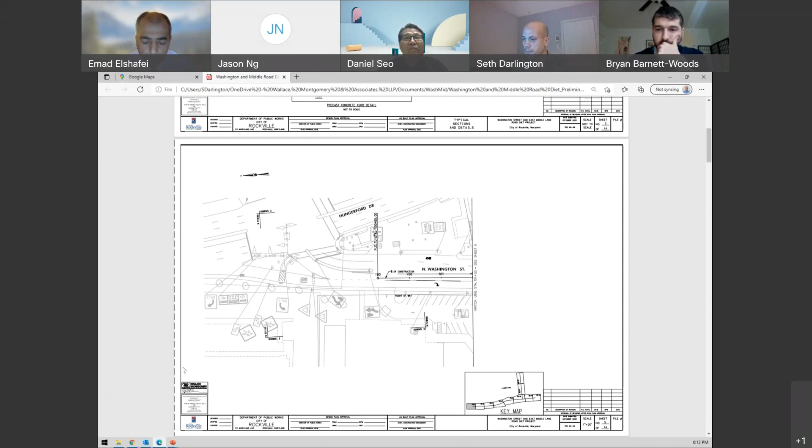But as we move south, you can see that we've got 2 lanes of traffic really in each direction at this point, approaching that intersection. And then as we move south, I'll slide to the next plan. You can see that we're transitioning to 1 lane in each direction of vehicle travel.

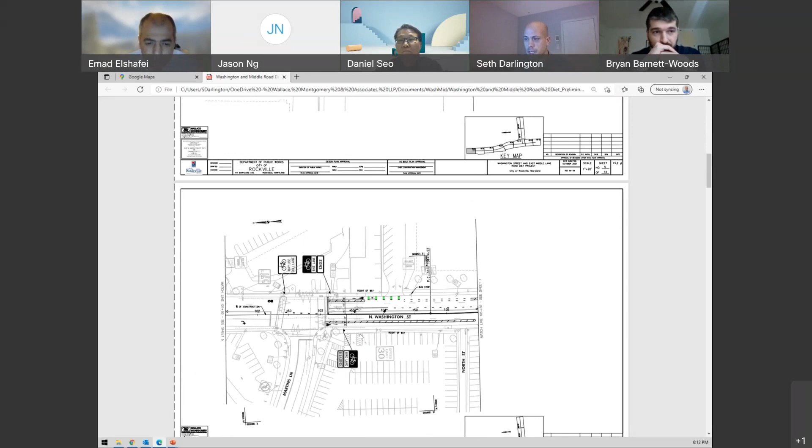And then we're able to add in bike lanes on either side of the roadway, and a buffer in between the bike lane and the travel lane. I'm going to zoom in on that area a little bit so you can see what's going on. Hopefully you can see my cursor as well here. So this area here is the bike lane.

It's 5 feet wide. It's against the curb of the existing roadway. And then this striped hatch area, this is the buffer - the separation between cars traveling and bicyclists traveling. In that buffer, what you're seeing here is paint marks, just painted stripes on the roadway. The width of this in this location is 3 feet. So it's a good separation between cars doing 25, 30 miles an hour and bikes doing 10 or 15.

It's comfortable for bicyclists to use, and that separation is enhanced in this case where we're expecting to add in a concrete barrier that positively separates the bikes from the vehicles. That concrete barrier is a precast, pre-made system. It's a concrete, low concrete curb essentially. It's 2 feet wide, and low to the ground. It'll be visible for cars and bikes. It'll be a positive barrier, so cars can't swerve over into that bike lane without jumping over the curb. That really brings up the safety and the usability of that bike lane.

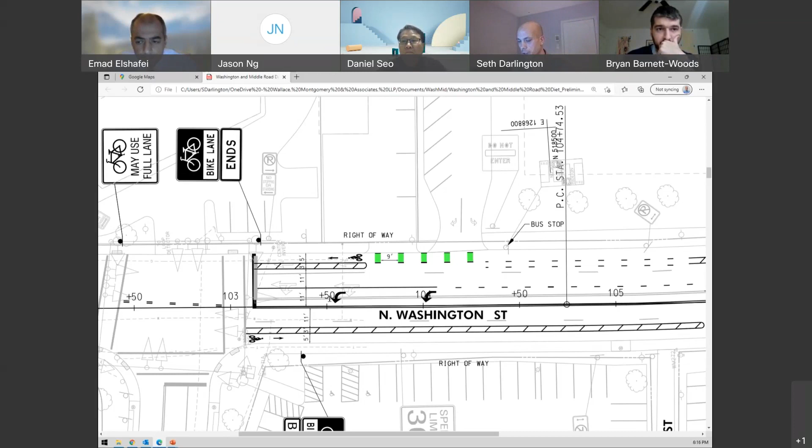So, how to read these plans a little bit more: the gray lines, sign shapes, and shading is all of what's out there now. The darker black and green signs and line work are all of the proposed work. That's how you can see what's changing in these plans.

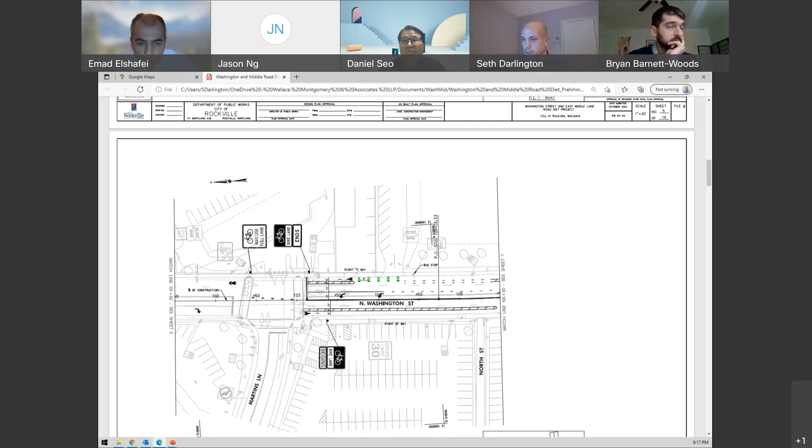Okay, I'm going to move south again, and point out a couple things on this plan. This is pretty consistent with the one we just went over: 2 travel lanes, one in each direction, bike lanes on the curbs, and buffers in between the bike lanes and travel lanes.

One of the things you'll notice here is we've got these green block shapes on the roadway, and that's where we have conflict areas between bicyclists and vehicles -- where vehicles turn in and out of driveways, or cross over the bike lane for a left turn. We're not showing that in this location, but that would be another use for those green areas. I'm sure you've seen these elsewhere.

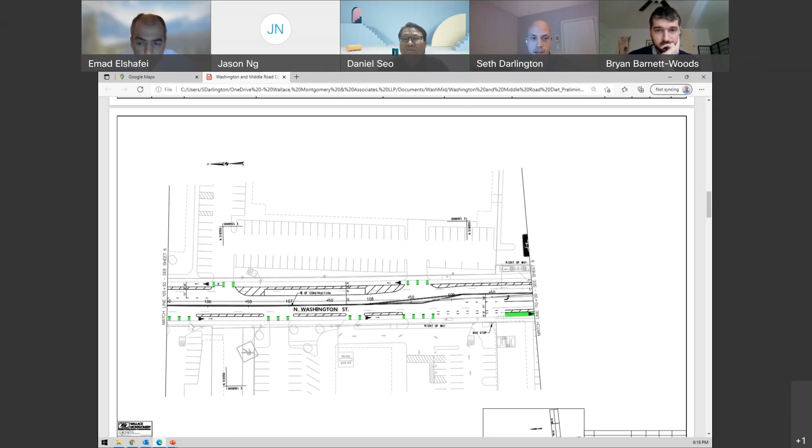It's just green paint that highlights a location where you need to look out for bicyclists, whether you're driving a car or a bike, for turning vehicles coming across your path. So it's a good visual indication for that safety area.

The other thing you'll notice is this location where there's a wide hatched out area -- we are putting in street parking here. This larger rectangle area is where street parking is proposed, in a floating parking system where the bike lane stays against the curb, and the parked cars are pushed towards the travel lanes, right on the edge of the roadway. This further buffers the bike lane from traveling vehicles.

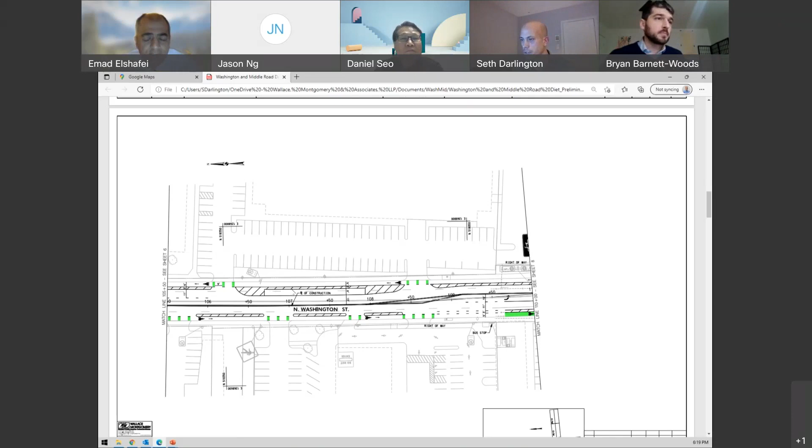So you can see we've got a wider travel lane through here, narrowing. We don't need that much room for parking -- a little bit of a buffer and a bike lane pretty consistently all the way through. Where these floating parking areas are, we wouldn't need those concrete barriers as the buffer.

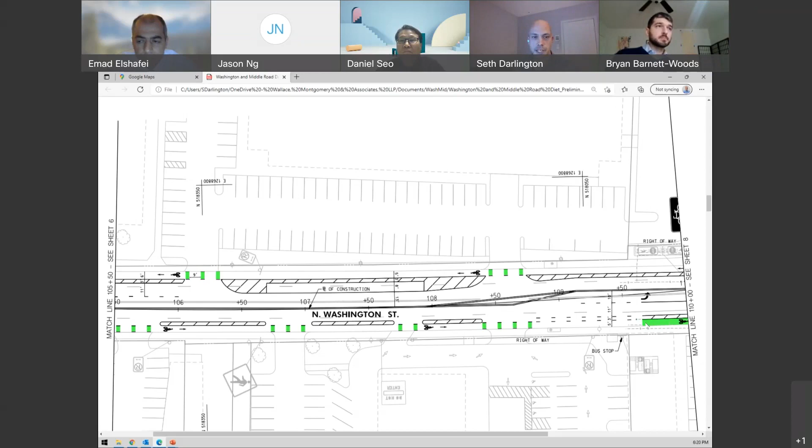So I'm going to move south again, but I'll point out one thing here: this solid green area is part of a bike box for the next intersection, and I'll explain that as we get down here. So I'm going to move south.

Now, as I just mentioned, there's this bike box at the Dawson Ave intersection. That's a way for cyclists to navigate through this intersection and make safe left turns. At this point, when making left turns, they'll be integrated with the flow of traffic through the intersection. They should follow the street signals for traffic. When there's a left turn indicated with a green arrow, they'll be able to make that left turn. But to do that, they need to be in the travel lane, and visible, in front of turning vehicles.

So it allows cyclists in the bike lane to travel up north, and when there's a red stop, come across into the bike box. This is an area just for cyclists -- vehicles need to stop at the stop bar behind it, and cyclists will stop right in front of turning vehicles. When the green arrow starts, the cyclists will be in front of vehicles. They'll make their way through the intersection, turning left, going west on Dawson Ave, entering that bike lane, and then the cars can move on beyond them.

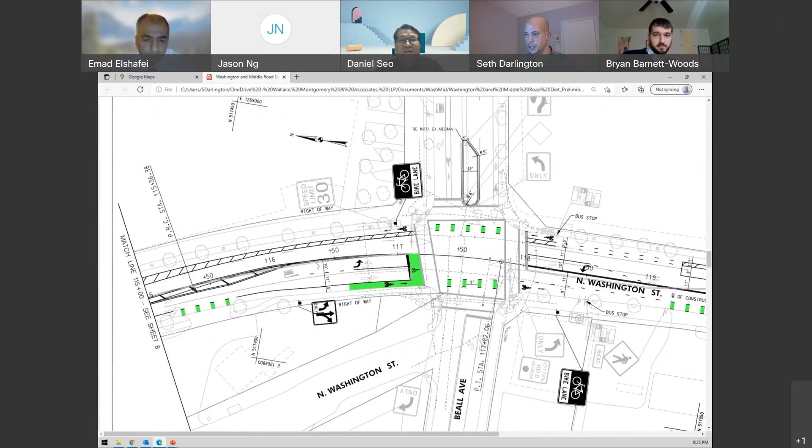I'm going to keep going south here. We're pretty consistent within the roadway still, two lanes of travel in each direction down to one. We've got left turn lanes, parking where we can, and another bike box here for the left turn onto Beall.

One other thing I want to point out here is that we've got another proposal to remove some of the pavement, at this location. This is a little island here on the west side of the Beall intersection.

Approaching from the east, approaching to the west on Beall, we've got a left turn lane, so this lane of Beall is going left only. We've got a through lane. Then on the western spur of Beall, we've got two lanes of traffic, but this center lane really should never be used because there's really only one lane of travel entering it.

So we thought, why don't we expand this median? Again, it could be landscaped, there could be enhancements in that area, it could be stormwater management, which we'll need for this project. But it really effectively shortens the crossing distance for pedestrians on this side of the intersection. They're really only crossing one lane of travel, then they've got a refuge area in the center, and then they can cross the other two lanes when it's safe to do so.

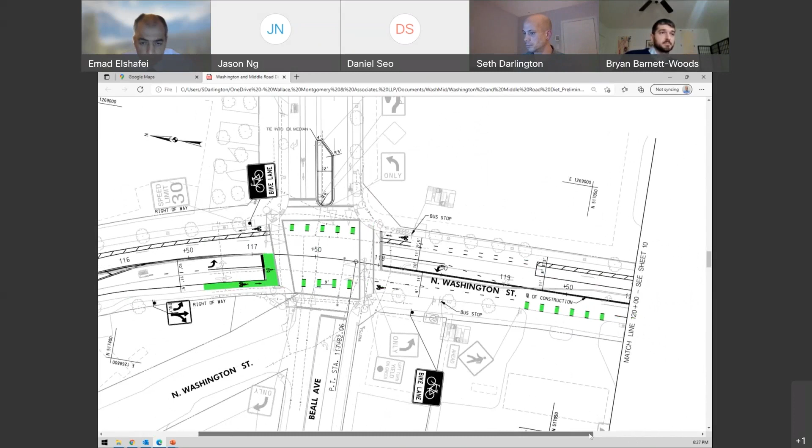So another small thing that we're looking at for enhancing safety. We'll keep coming south, but I want to point out more parking area in here, this location just south of Beall Ave. Parking here, a little bit of parking here. Again, consistently two lanes of travel down to one in each direction, turn lanes where we can fit them in.

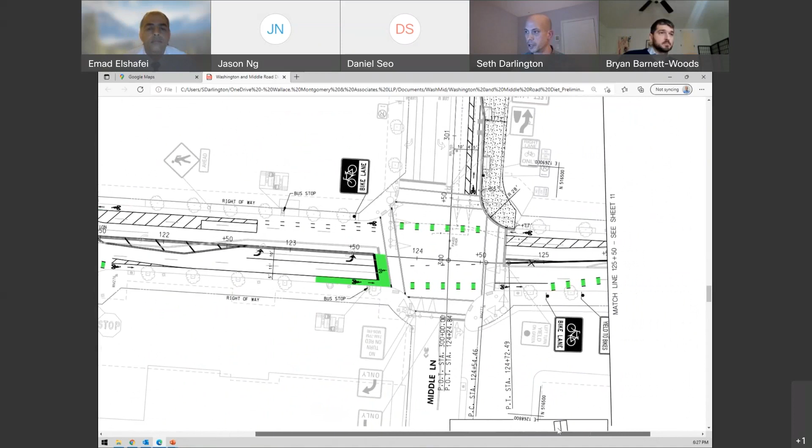Bike box here, we're at the intersection of Middle and Washington, and a lot of the sidewalk work is really concentrated in this location here.

For those who might be familiar, this area of Middle, the sidewalk starts at a nice wide sidewalk area, pretty comfortable for folks walking down, then it narrows to a very narrow section, and then widens out again. There's one building that sort of pushes out into the sidewalk, narrowing it much more than any other sidewalk in the town center.

So the goal with this work is to expand that sidewalk, create a much wider path of travel for people walking through here, bringing vitality for the businesses, enhancing the walking area, but also including the bike lanes. So we're taking one of those lanes of travel on Middle and creating a wider sidewalk and a new buffered bike lane.

So this is what you're seeing in this area, all of this dappled patterning—that's all new concrete sidewalk. It expands from about 12 feet out to 17, and then even farther out to 22 feet. The reason for that little jog is there are some utilities underground in Middle that we're trying to avoid, which would be a big cost increase if we impacted those utilities.

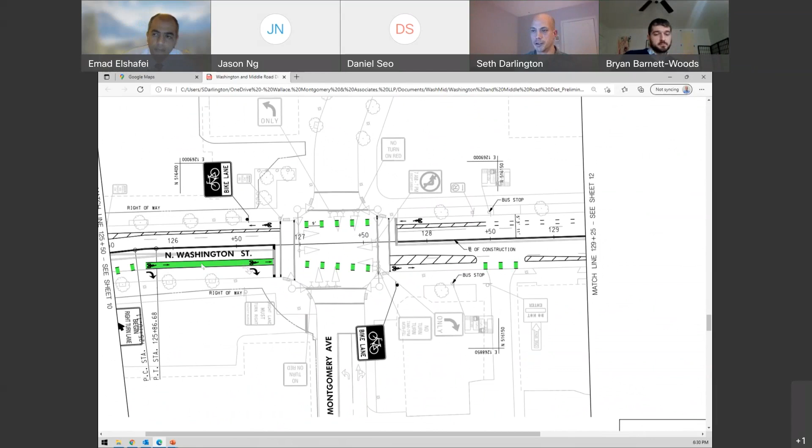I'm going to keep going south on Washington quickly, then jump back to Middle in a second. Not much new to point out here, although there's one area where we have a solid green bike lane on the southbound direction. We use that treatment when bikes should be exclusively in that area, but it's not against the curb lane. You can see there's a right turn lane against the curb, and then the bike lane between that right turn lane and the southbound travel lane. Vehicles cross over the bike lane in this hatched area to get into the right turn lane queue and stop at the intersection, so this area of the bike lane isn't protected—we add green paint to enhance that. And then we end at Jefferson, where we have another bike box.

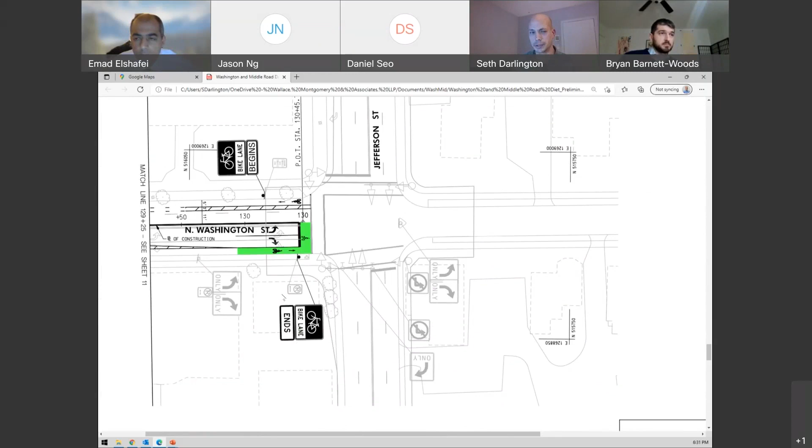We're expecting the bikes to turn left or right there. There is no bike lane, I believe, on Jefferson currently, but maybe that's something we can look at for the future. So that's the south end of the project. I'm going to keep going south.

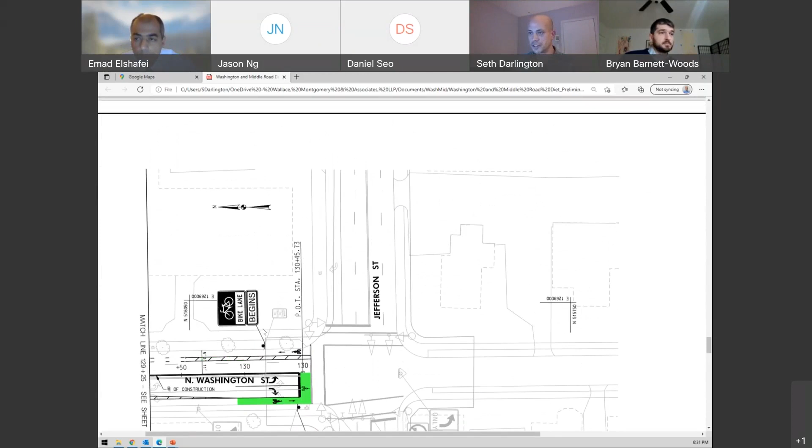Here we go—now we're going to pick up on Middle, and now we're switching orientations, sorry about that. North is up in this plan sheet. I'm going to zoom in a bit more on this location because the road work is pretty consistent with what we were looking at on Washington: new bike lanes, buffer area, taking 2 lanes of travel down to 1.

Not much different in that location, but the big change here is that what used to be a very narrow 5-foot sidewalk is being expanded out to a 12-foot sidewalk, which fits in much better with the town center. Nice wide sidewalks throughout—we're expecting this to make a big difference for pedestrians in this area.

This building, you can see the outline here, has a driveway entrance, so we're not cutting off access to anyone—we're keeping all of that open. But we're making sure it's safe in that conflict zone where cars cross the sidewalk or the bike lane. We'll treat that as a driveway entrance, but the safety priority is the pedestrians walking through and the bicyclists crossing over it as well.

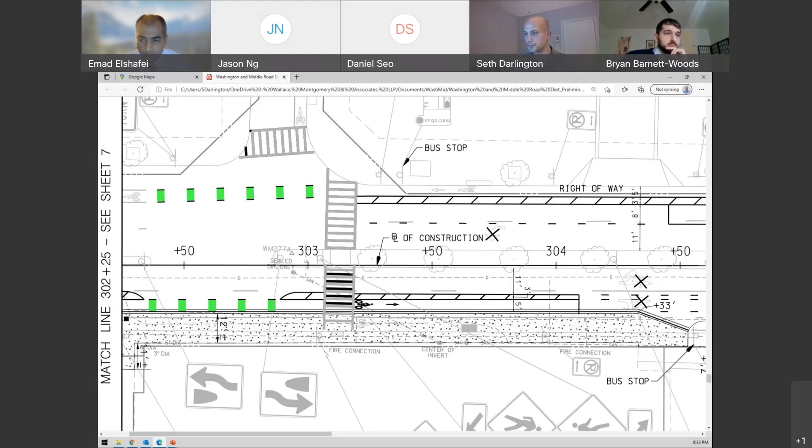So that's the end of our expanded sidewalk. The bike lanes keep traveling out to the east, and here we are back at 355, this intersection on the right side of the page.

This is a location where we're still doing a bit of work. We'd love to be able to continue that bike lane up to this intersection, and maybe even through it, but we're making sure we have all the room on the roadway to do that safely. This is a state road intersection, so there's a bit more we need to worry about and think through in that area.

And we know that changes to how vehicles traverse through this intersection will take a little more thought. So we're hoping to bring that bike lane at least to this intersection, if not through it, but we're not quite showing that yet.

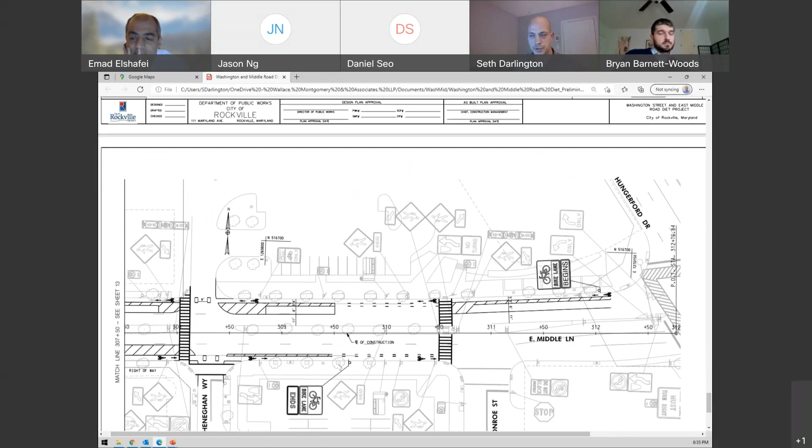Another thing I'd love to bring up—we've just finished with the plans, but I want to mention how we're treating bus stops. That's something we're also thinking quite a bit about as we move forward with this project, and it's still a bit in the works. Generally buses pull to the curb, and people get on and off right onto the curb itself. So if we're putting in a bike lane on the curbway, the way buses would need to drop off people is they'd pull across the bike lane, across the buffer, and stop next to the curb.

This definitely creates a conflict for cyclists, and it's also sort of confusing for bus drivers to pull across buffered lanes. So one of the things we've been talking about with Emad's group is possibly installing some floating bus stops. That would be a system that would either bump out the curb, bump out the sidewalk at the bus stops, or use a pre-made system that would sit in place in that area. So the buses wouldn't need to pull across the bike lanes.

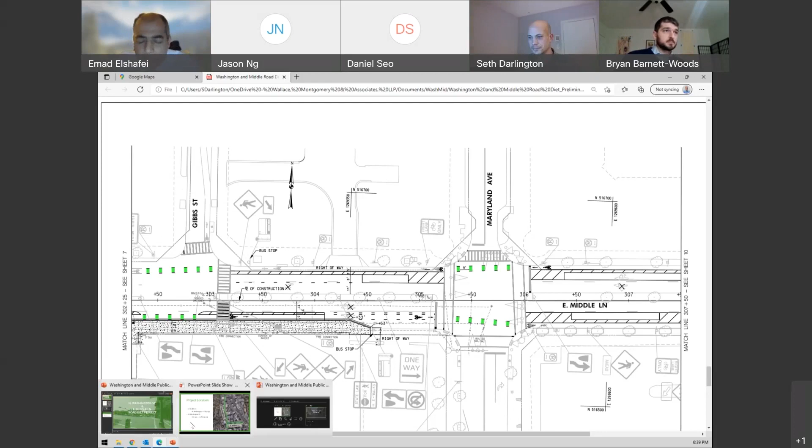I just want to talk a little bit about some of the comments I see. Of course, some people are supporting the road diet, some people are against the road diet and concerned about congestion. I see support for the bike lanes, I see people against the bike lanes. But I want to go back a little bit and explain how we came up with these ideas, or these concepts.

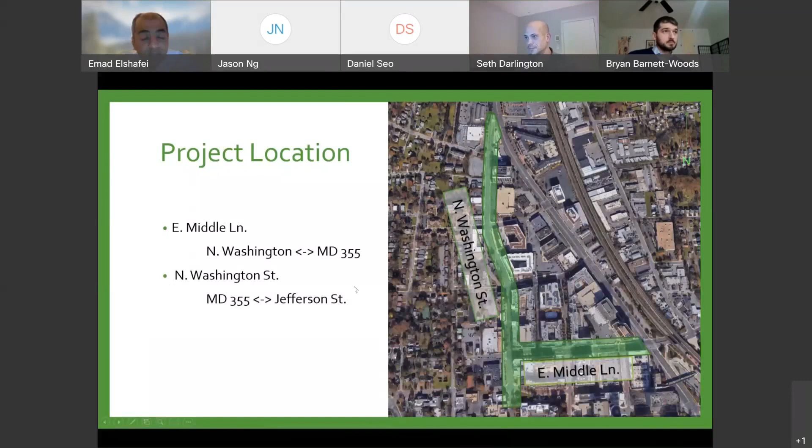We have a bikeway master plan that was studied for 3-4 years and was adopted by the Mayor and Council in 2017. The bikeway master plan calls for bike lanes on North Washington. Of course, we already have bike lanes on East Middle Lane, and on Beall and Dawson that would be built. So the bike lanes are an element of the bikeway master plan, and therefore what we are doing is implementing this bikeway master plan.

This is just one component of this project. As you see, the bike lanes already exist on East Middle Lane, we are just adding buffers to them. But on North Washington, that's new. And this is not just bike lanes on North Washington so we can have them in town center. Actually, we are creating a network, and part of this network is that the bike lanes will go on North Washington and keep going, then turn left on Martins Lane and go to Montgomery College, which is one of the important centers for the bike lanes.

So I understand some people might say, well, I don't see many bikes and maybe we don't need bike lanes, but part of what we're doing in the city is building a network for bicyclists, and based on the bikeway master plan, we're supposed to put bike lanes on North Washington. Bicycles are part of the transportation system, and more users are using the bike lanes. Obviously when you have a bike lane, people use them, and if you don't have bike lanes, people will be afraid to ride on a street like North Washington. So we're just implementing what has been adopted in the past.